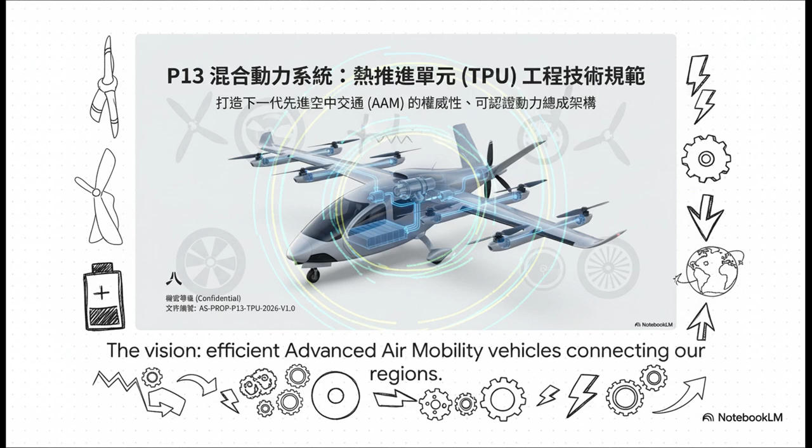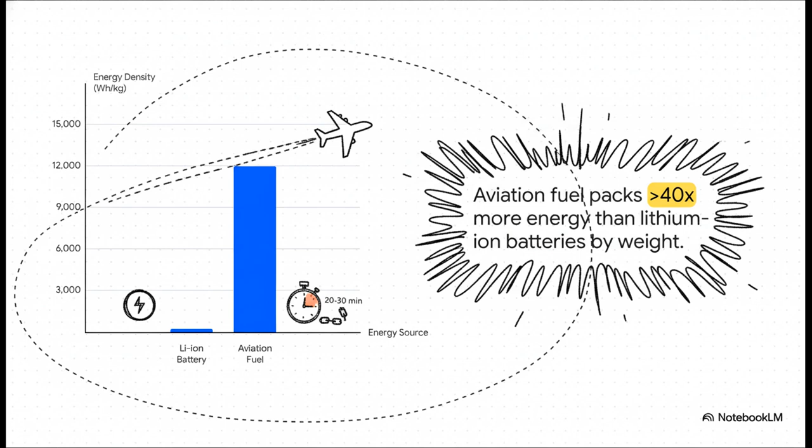And here it is. This chart shows you everything you need to know. Aviation fuel, your standard Jet A, packs over 40 times, 40, the energy of the best batteries we have, pound for pound. That huge gap means pure electric flight is stuck at maybe 20, 30 minutes tops. That's just not enough to connect cities. So how do we get around it?

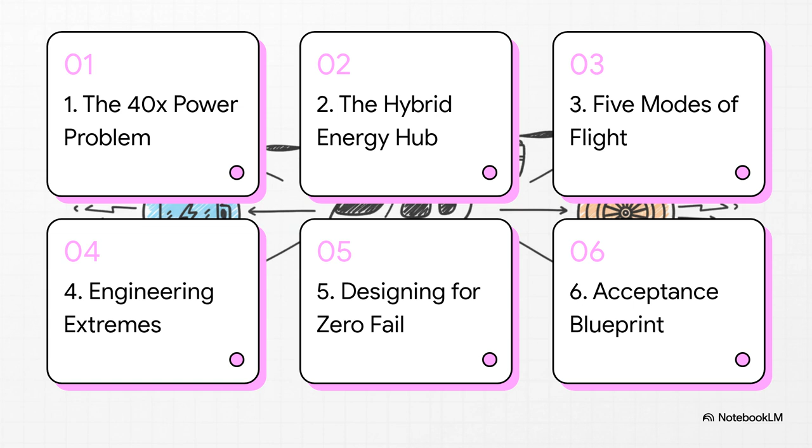Well, here's the plan. We're going to walk through the architect's blueprint for solving this, piece by piece. We'll look at the problem, the hybrid architecture we're using to solve it, how it operates, the major engineering hurdles, the absolute focus on safety, and finally, how we prove it all works.

Okay, first things first. Let's really dig into why this energy gap isn't just some small technical hurdle. It's a total showstopper for any serious air taxi business. The problem isn't just about how long you can stay in the air. Think about it this way.

For a pure electric plane, the batteries you need can eat up 60% of your total takeoff weight. So imagine a 4-seat air taxi, where 2 of those seats are just batteries. You can't sell a ticket for a battery. The business case just completely falls apart. From a systems perspective, the conclusion is unavoidable. Right now, a hybrid powertrain is the only viable path forward.

So if hybrid is the answer, what does that solution actually look like? Let's get into the architecture, because this is where some really elegant, really smart systems engineering starts to happen. Okay, take a look at this. This is the P13 system.

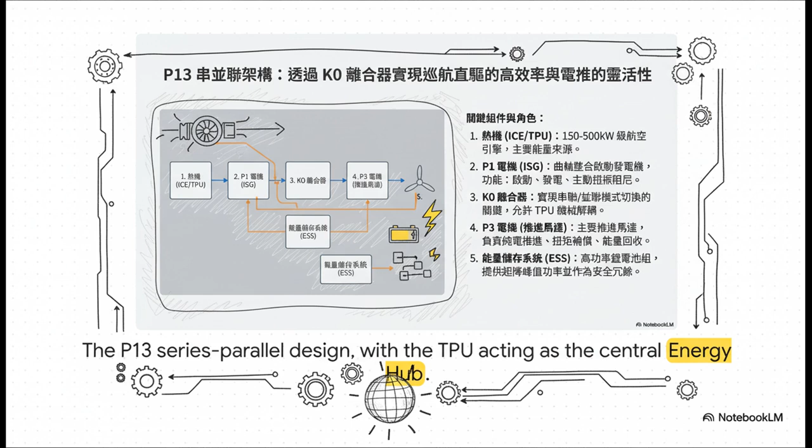It's a series parallel hybrid design, which is a fancy way of saying it gives you the best of both worlds. It can act like a generator, making electricity, or it can have the engine and motor work together to turn the props. And at the heart of it all, the star of the show is the Thermal Propulsion Unit, or TPU. Think of it as the central energy hub for the entire aircraft.

Now, I want to be really clear about this. The TPU is not just some engine we grabbed off a shelf and bolted on. No way. It's a highly integrated, intelligent power module. It's designed from the ground up to decide, okay, right now I need to spin the propeller directly for max efficiency, or nope, time to switch gears and generate electricity to top off the batteries.

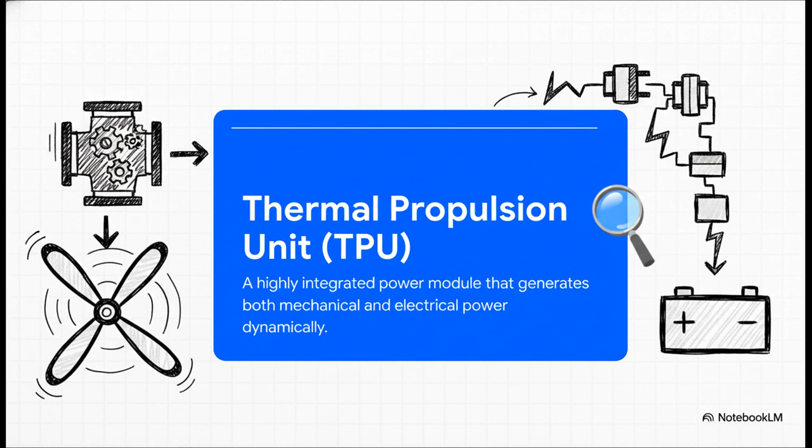Now, this is where it gets really cool. The real genius of this design is how it seamlessly switches between 5 different operating modes to optimize for power, efficiency, and safety during every single part of a flight. Check this out. Mode 0. That's your cold start. The electric motor fires up the engine in under 5 seconds, even if it's freezing out.

For takeoff, you get an e-boost, where the engine and battery work together for maximum power. Then you settle into Mode 4, your super efficient cruise. And the big one? Mode 5, the air start. That's your critical safety net. The ability to restart mid-flight isn't a nice-to-have, it's an absolute must for certification.

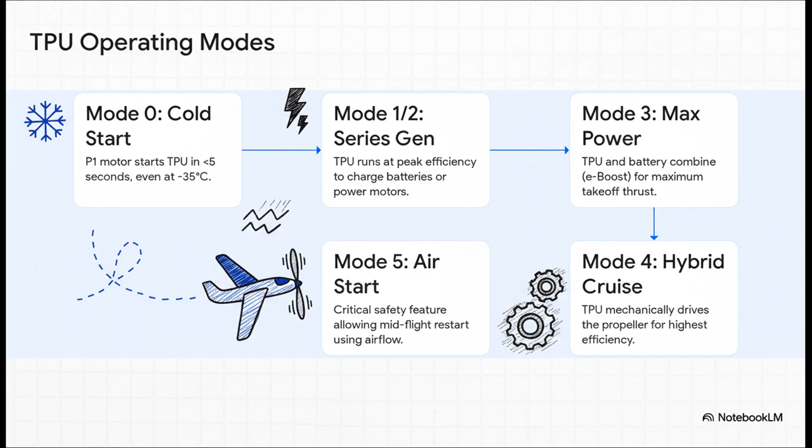So this all sounds great on paper, but trust me, it wasn't simple. To get here, the engineering team had to basically go to war with physics on 2 major fronts. First up, altitude.

As you go higher, the air gets thinner and engines start to choke. They lose power. The solution is a turbocharger, which forces more air into the engine, guaranteeing you have full power when you need it.

The second problem is vibration. Piston engines shake violently. The really brilliant thing here is that the P1 electric motor is used to create anti-vibrations that literally cancel out the engine's shudder. It's like noise-canceling headphones for the entire powertrain.

Now, in aerospace, you don't reinvent the wheel if you don't have to. You make smart, strategic choices to reduce risk. That's why the team chose a proven engine core, the Rotax 916IS. This thing already has fantastic performance at altitude. It's lightweight, and this is the real kicker, it already has a certification baseline with EASA. That one decision saves years of work and headaches.

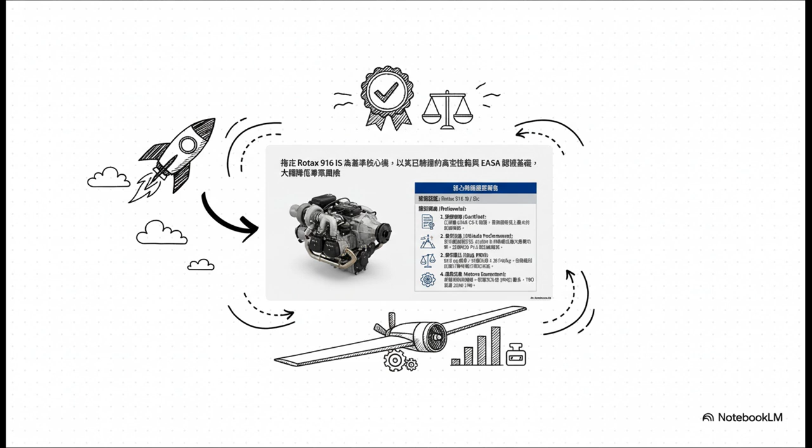Okay, let's talk about some key numbers. These aren't just goals or targets, they are survival thresholds. Take that power to weight ratio. If you fall below 1.8 kilowatts per kilogram, the entire hybrid system becomes what we call ineffective payload. It's just dead weight you're hauling around for no benefit at all. You have to hit these numbers.

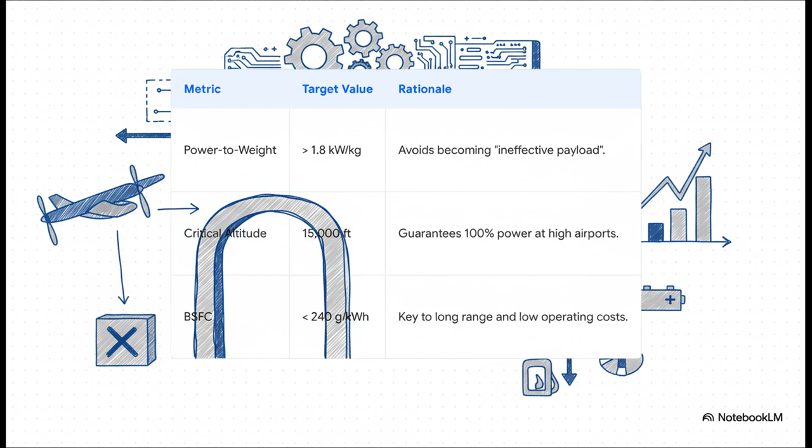All right, let's get to the most important part of any aircraft design, safety, because all the performance and efficiency in the world mean absolutely nothing if the system isn't safe. This is all about designing for zero failure from the very beginning. Safety here isn't an afterthought, it's the foundation of the whole design.

You see that firewall? That's made of titanium. It's designed to withstand a fire hotter than lava, 1100 degrees Celsius for a full 15 minutes. That's a wall of protection that separates the engine from the batteries and, most importantly, the people in the cabin.

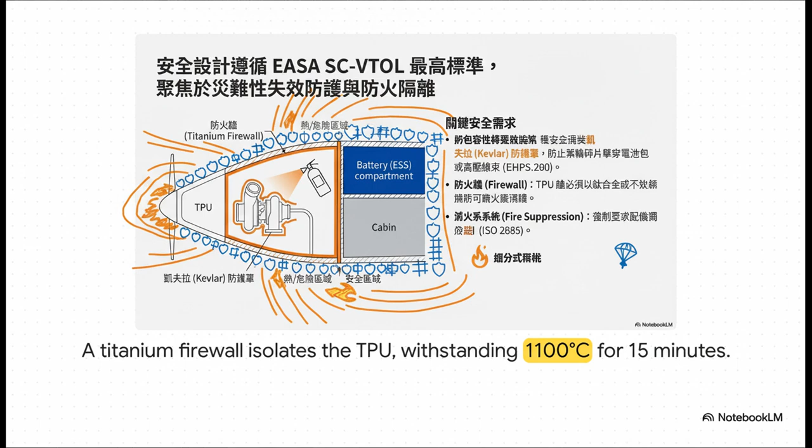And the whole philosophy is based on layers of protection. There's a Kevlar shield in case the turbocharger fails. The engine's computer, its brain, has 2 separate power sources, plus its own backup generator. The whole point is that no single failure can ever lead to a catastrophe. In this system, if you lose the entire TPU, it's a major event for sure, but the plane can still land safely on battery power alone. That's the key.

So we have this incredible blueprint. We have the safety design baked in, but how do we actually prove that it all works as advertised? That brings us to the final exam, the acceptance blueprint. You don't just bolt this onto a plane and hope for the best. It's a rigorous 3-stage process.

First, we test the engine by itself on a dynamometer. Then, it gets integrated into what's called an Iron Bird, a full-scale replica of the entire powertrain on the ground to make sure all the parts talk to each other correctly. And only then do we throw the worst conditions imaginable at it: extreme altitude, intense vibrations, and icing.

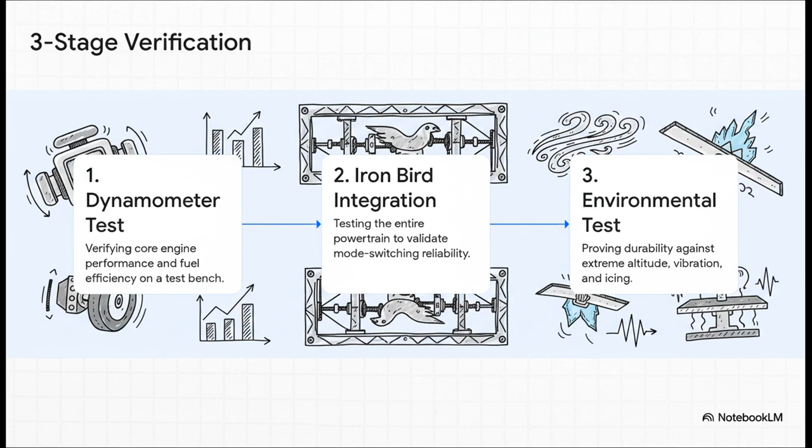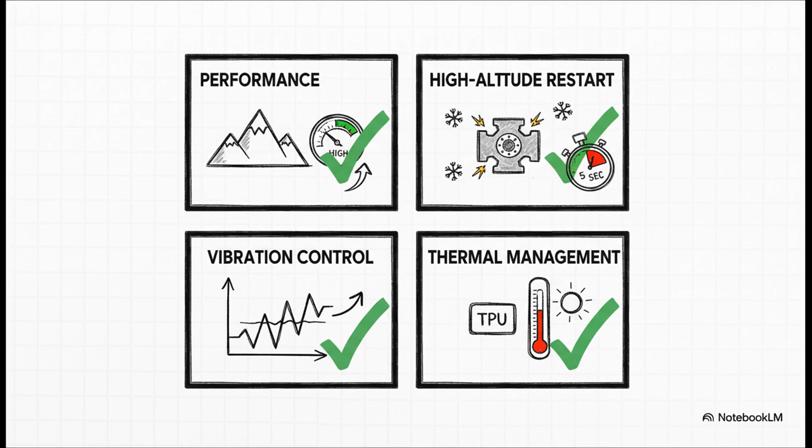And this right here is the final scorecard. It is black and white, it's pass or fail. Does it deliver 160 horsepower at 15,000 feet? Yes or no? Can it restart in under 5 seconds in the freezing cold? Yes or no? Does it overheat during a max power climb on a hot day? Yes or no? If it fails even one of these tests, it doesn't get delivered. Period.

So when you boil it all down, the big takeaway is this. Success in hybrid aviation isn't about just taking an engine and a motor and sticking them together. The real magic, the secret sauce, is in the deep, complex engineering that solves the coupling of heat and electricity, making them work together as one seamless, intelligent system.

So this blueprint, it effectively cracks the code on the powertrain. That's been the biggest engineering mountain to climb. The question for the industry is no longer if the technology will work, but when it will be part of our daily lives. The next frontiers are things like air traffic control, building out infrastructure, and of course, public acceptance. The engineering is becoming reality, and that is how the future takes flight.